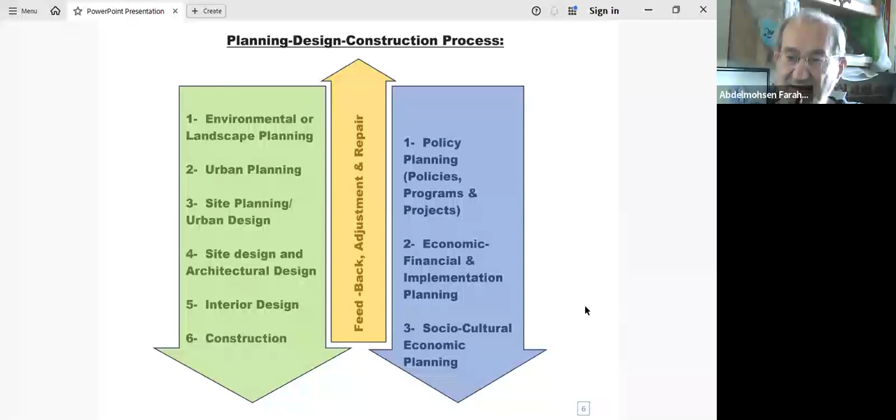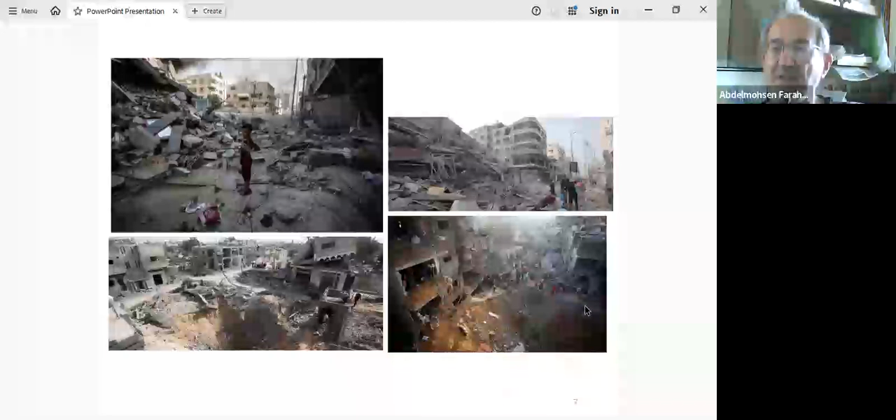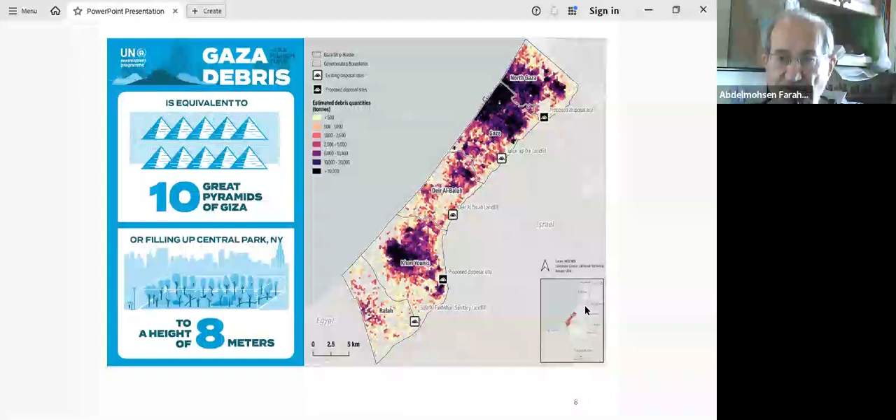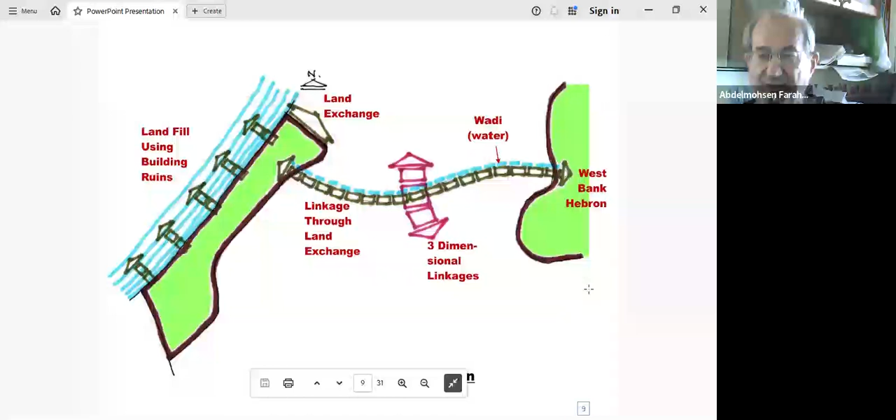If we want real peace to happen, this must be adjusted in a fair way. And one of the ways is to have land exchange. So land exchange can occur in the case of Gaza by expanding northward and by having a passage, a land passage linking Gaza to the West Bank. In that case, I would recommend highly to be accompanied by a wadi carrying water to Gaza. Then there must be a three-dimensional solution linking north to the south of Israel and, of course, east to west of Palestine.

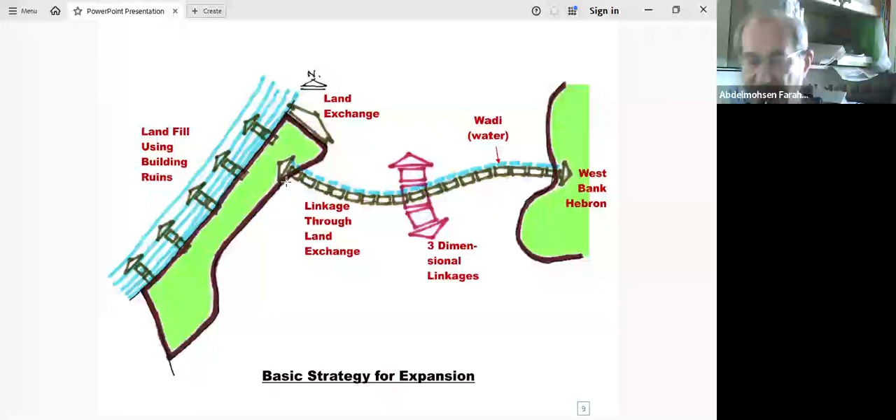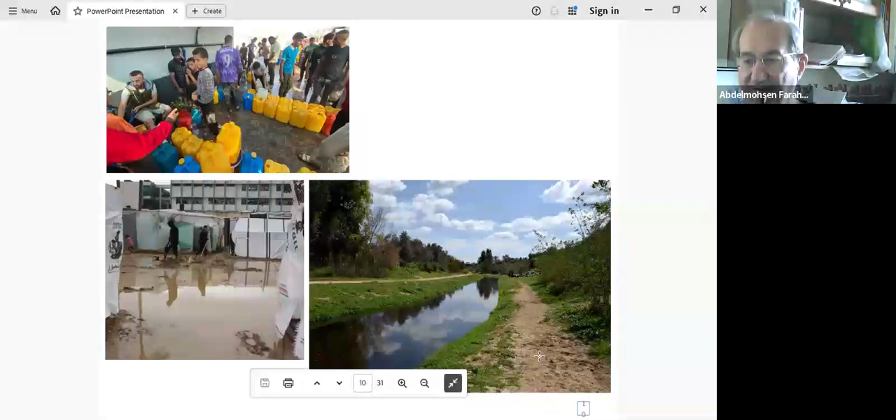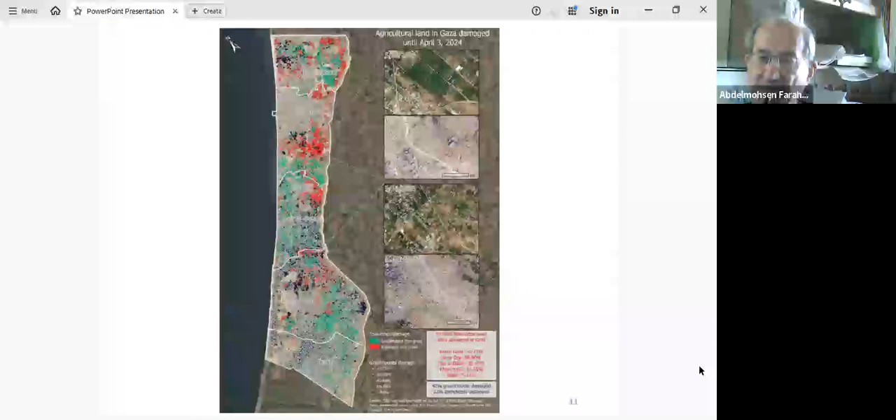This map indicates the destruction that happened in the agricultural lands, which leads me to this first step in planning, in environmental planning, which is the basic green open space system. Basically, agricultural land should occur more on the north, where rain is more frequent. It should occur on the east, the eastern borders, accompanied by anaerobic digesters with sanitary treatment of sewage into irrigation water, irrigating the agricultural land in a proper way in various degrees of purification. We will talk about this later. Of course, it would generate also methane gas as a source of energy.

Now, the starting point in this basic green open space system is the three wadis of Gaza: Wadi Gaza in the middle, Beit Hanoun stream in the north, and Al-Salqa stream in the south middle. On the north coast, another green strip can occur with greenhouses. Now, these greenhouses on the waterfront wouldn't be just for food production, but would also act as solar stills that convert saline water into irrigation and potable water.

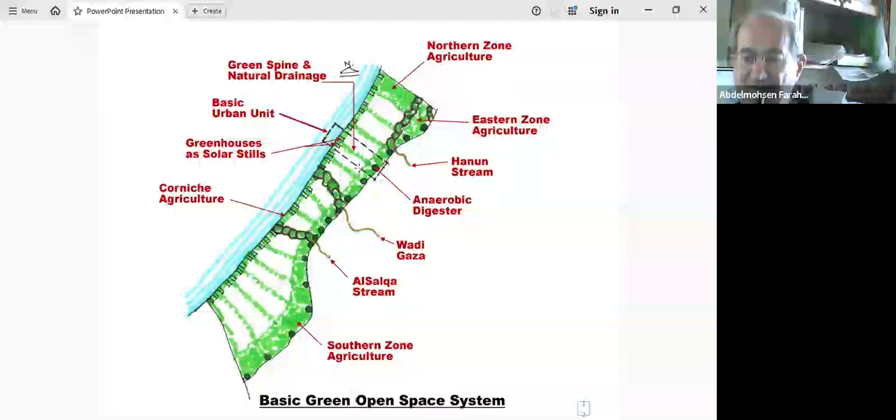Public transportation is very important, and the shape of Gaza is very suitable for public transportation. We have what is called Alrasheed Coastal Road on the west.

Then we have Salah ad-Din road in the middle, and I suggest a new one to the east related mostly to railroads and carrying goods that can extend to Egypt. The passenger road in the middle can also extend to Egypt. In my opinion, we should extend both of them to Egypt, linking the economy, strengthening the economy of both countries.

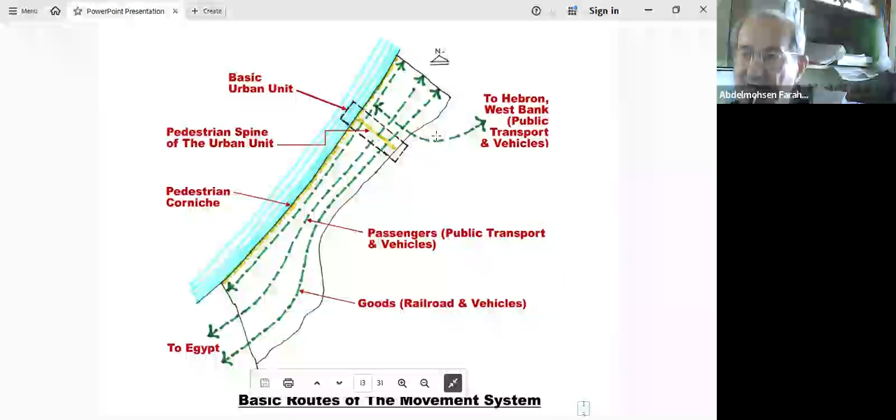Now, the basic urban unit we mentioned in previous diagrams would consist of agricultural land on the east and urban corniche on the west related to pedestrians, and greenhouses acting as solar stills on the west on the waterfront. All the area west of Alrasheed Coastal Road would be landfill, something between 1 to 2 kilometers. This is to a reasonable depth into the water. This would make a lot of valuable property in pure economic terms.

And in my opinion, it can add a value to the economic aid needed for the reconstruction of all of Gaza. Here, the private sector can participate a lot, but it shouldn't be left completely to the private sector. It should be controlled. This is number one, height of buildings, land uses, etc. But also the financial gains. The price of land paid in this property should belong to the whole society, not only the new owners of this new property.

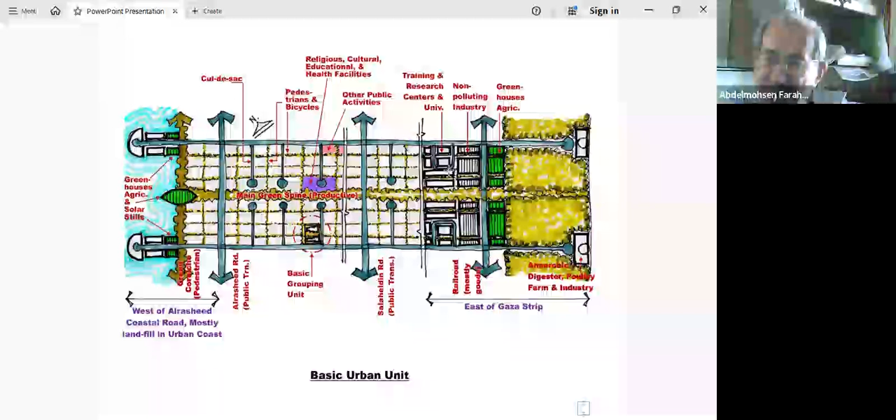So going from the east again, agriculture, then greenhouses, then non-polluting industries. The polluting industries would be attached to the anaerobic digester on the eastern edge. Beside the non-polluting industries would be training centers, research centers, universities, and some secondary schools, all attached to the non-polluting industries, working together to develop and advance.

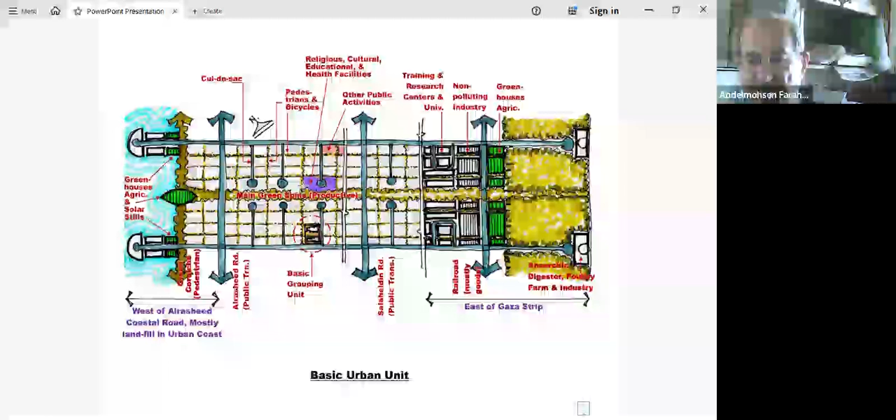Then we have the basic urban structure of almost any city, main roads and cul-de-sacs, and encouraging pedestrian movement as much as possible. And the distances would be very reasonable for walking. The weather also encourages walking and bicycles. There is a green spine in the middle of the urban unit. Everything green here is productive.

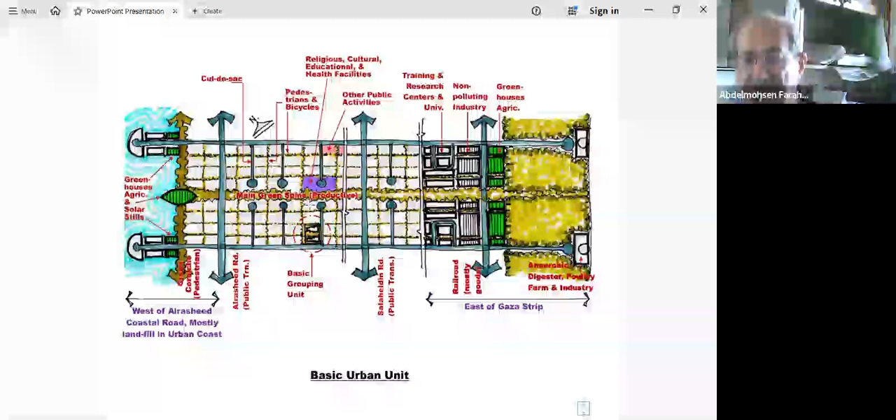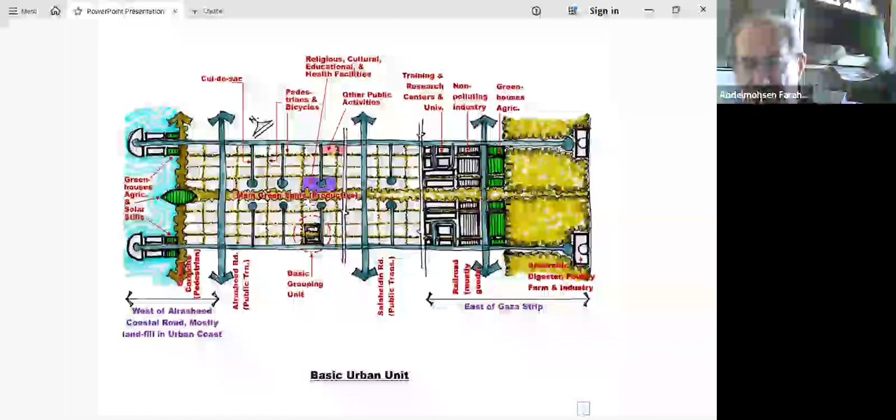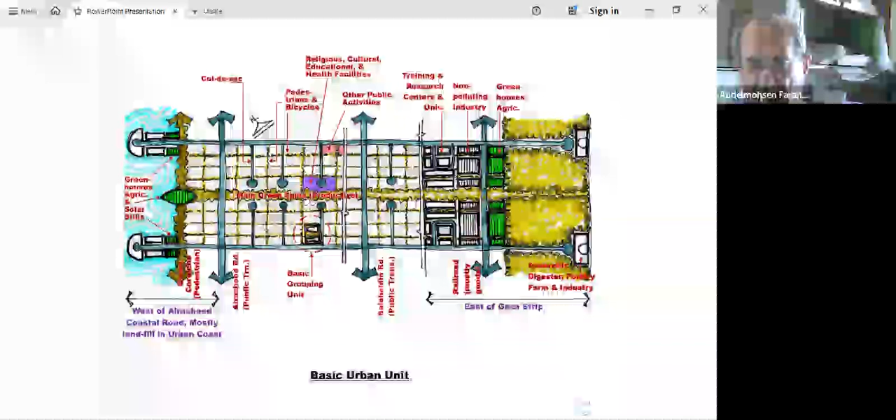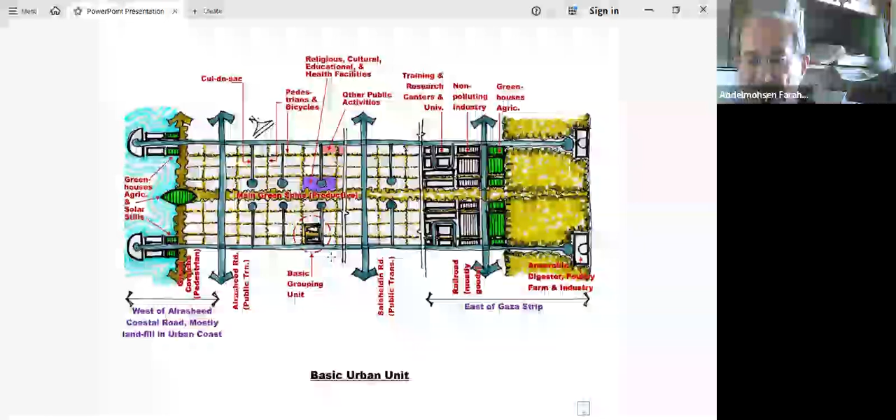The beautiful gardens of Andalusia were all productive gardens, producing vegetables, fruits, medicine, and perfumes. The fountain could be the source of the irrigation system, with a canal system related to the paving pattern of the garden. So everything in that garden was beautiful and productive at the same time. So it's an old tradition of integrating the aesthetic with the functional and the productive.

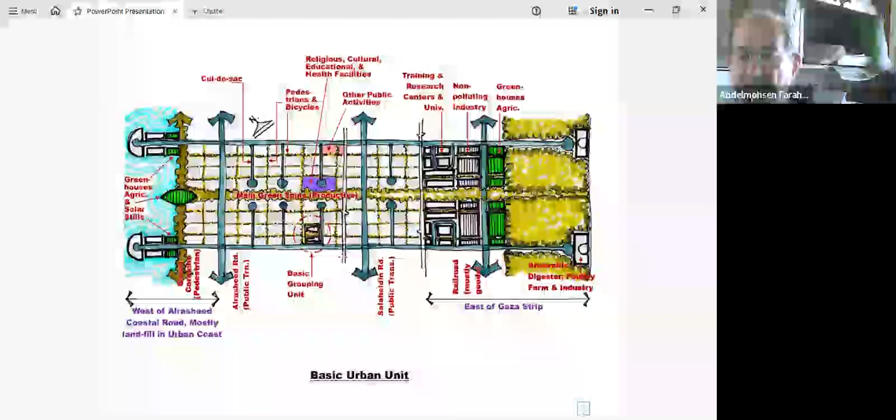This is a more detailed illustration of the eastern part and the western part without the huge middle part in between. So in terms of the agricultural, there are 3 zones going in hierarchy of the need for purification of water. So sewage treatment would be minimum in the first zone to the east. It can be just wooden forests.

The middle zone can be related to vegetables that need boiling, and the western strip would be suitable for vegetables and fruits eaten fresh. So in that last case, water quality should be the highest, followed by greenhouses, then non-polluting industries, then universities, research centers, and training centers.

Then we come to the waterfront property, and the most important principle here is that we avoid one row of buildings on the waterfront, which would have happened with Alrasheed Coastal Road and buildings facing the waterfront.

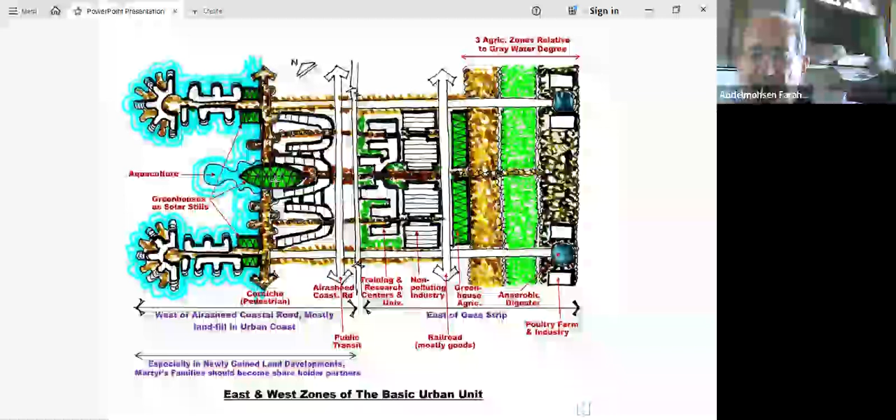In addition to the greenhouses I talked about in the middle and on the upper and bottom roads, acting as solar stills, converting saline water into irrigation and potable water. This is in addition to aquaculture related also to the greenhouse. They can support one another.

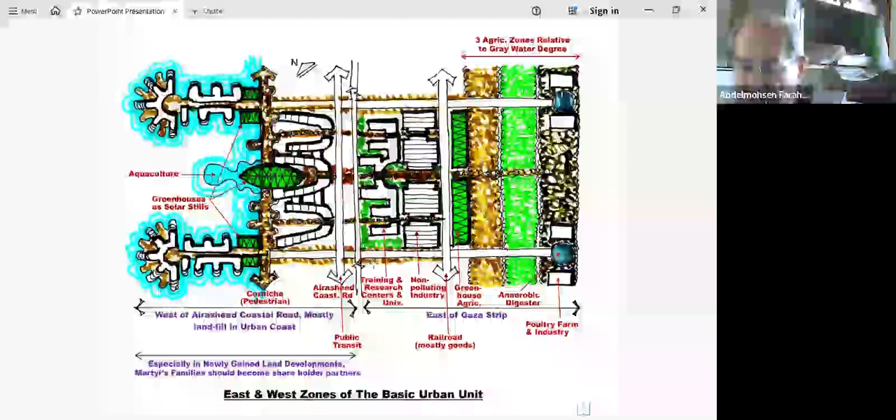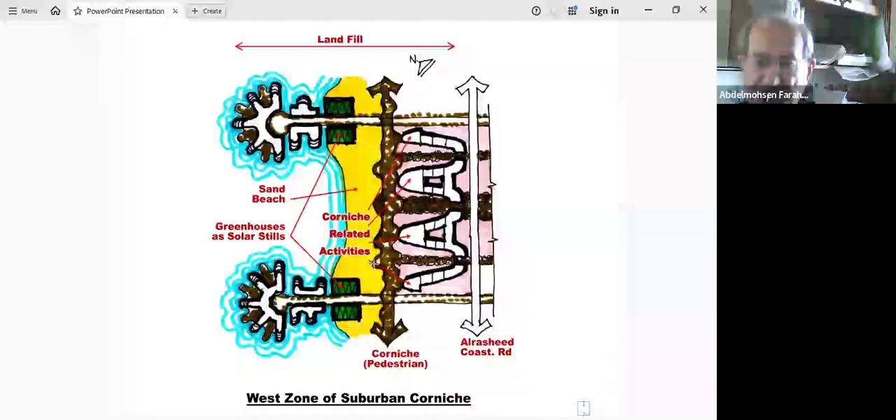This is what can be called urban corniche. But in addition to the urban corniche, we must have also suburban corniche, in which there is sand beach and the possibility of swimming. So according to site-specific factors, one would determine whether to go for the urban corniche or the suburban corniche.

Design guidelines: when we shift from urban planning to architectural design, in my opinion, we should not go directly to the single building, but we should go to what is called a grouping unit of several buildings. And the logic here is that the integration of several buildings into a grouping unit with a common open space would add a lot of good quality of life. This is number one. And number two, a lot of economic efficiency. I would say also socio-cultural efficiency.

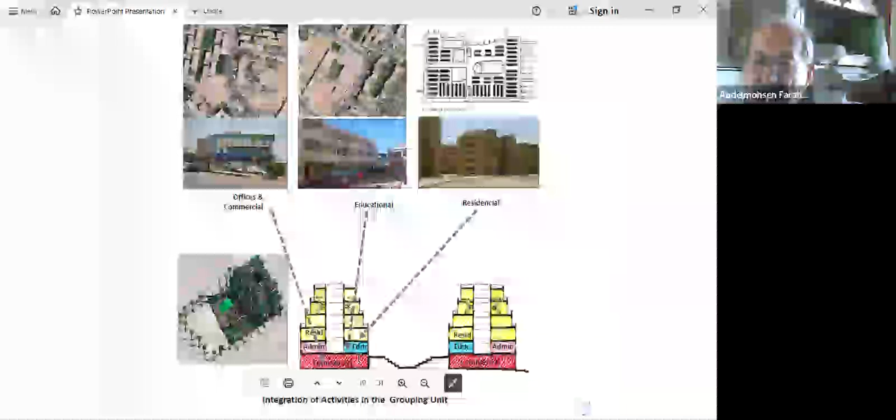So the main idea here is to put the regular common activities vertically above each other. Commercial activities at the bottom, including parking. After that, you have administrative activities on the outside and educational activities on the inside, facing the common space between the two buildings, and then followed by residential uses in the upper 4 floors. The total is 6 floors, but when you go into your residence, you don't shift directly, you shift indirectly, so the maximum going up would be around 4 floors.

Now, please notice that combining the open space of the educational facility with the residential facility means to save space, means to have more efficient use of space. And there is a logic in that. In preparatory schools, usually the ages are between 6 to 11. In my opinion, this is wrong. It means that one child is almost double the age of another child, using the same yard, using the same toilet. Children can hurt one another. So in my opinion, it should be divided into 2 halves.

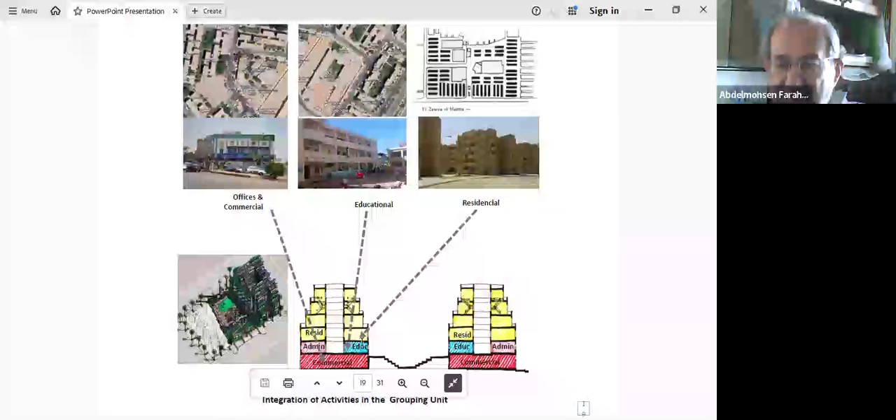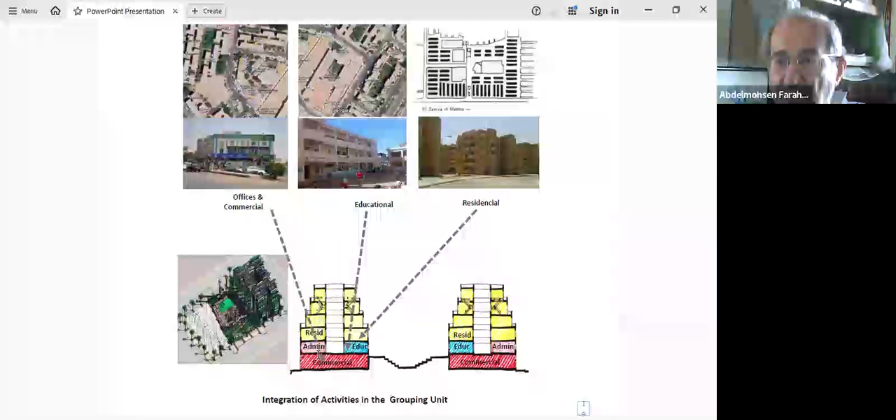And of course, the economic efficiency of the commercial activities, of the educational activities, of the administrative activities would save a lot in terms of the cost of the residential unit. The residential unit becomes much cheaper, whether in ownership or in rent, according to the societal organization related to this grouping unit.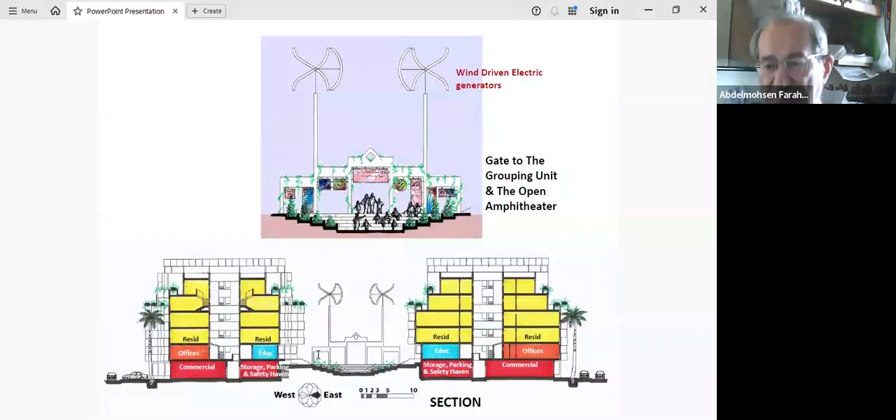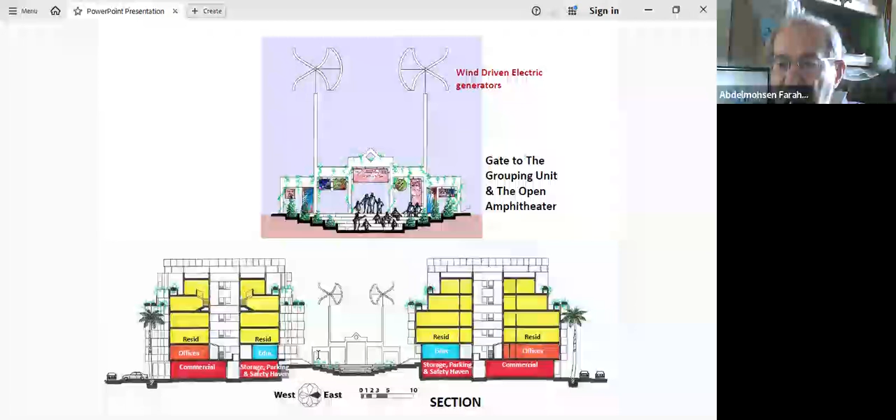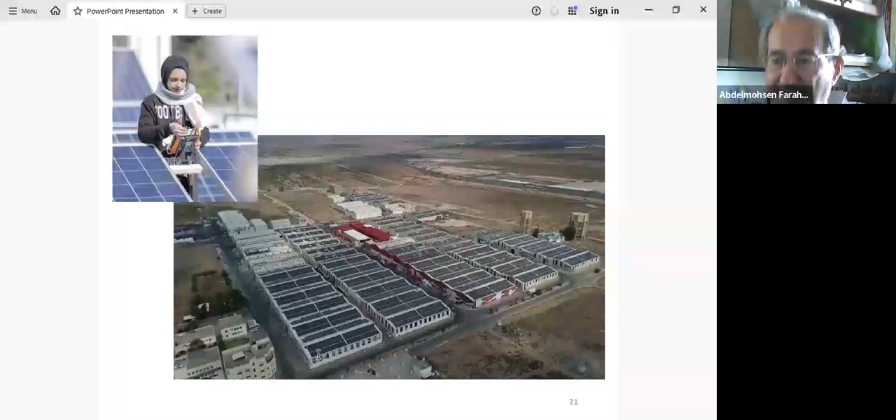More detailed section: the gateway to the grouping unit with wind-driven electric generators. This is medium to small scale, not the giant ones. And their placement in the space in between the buildings would benefit from the funnel effect of air currents, meaning that wind speed would be accelerated between the buildings, benefiting the efficiency of the wind generators. Solar energy was already applied in Gaza, but it should be applied at a far wider scale.

This is a 3-dimensional presentation of the grouping unit. Photovoltaic solar collectors at the top. Food production takes place in all terraces of the residential units and also in the public spaces, also in the streets. And there is an open air amphitheater in the middle, used as open air classrooms or just for public performances day and night as a social space.

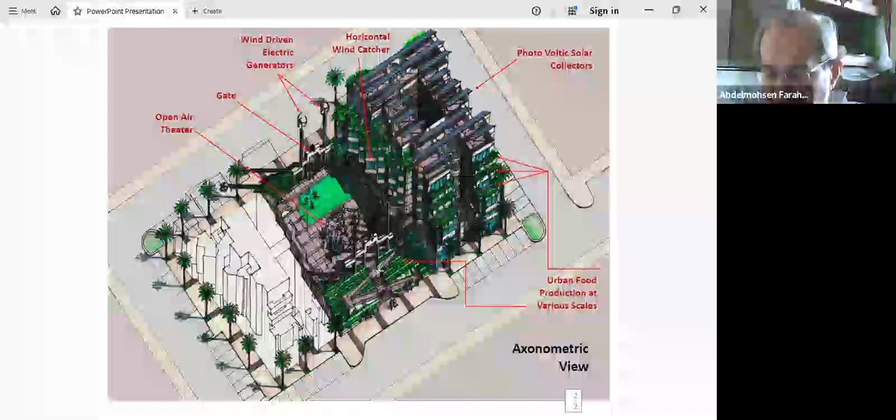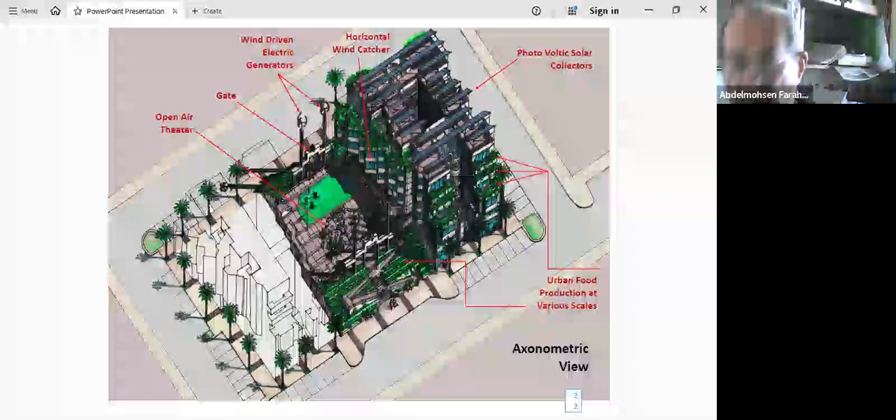I'm sorry, I did something wrong. Okay. Yeah, sorry.

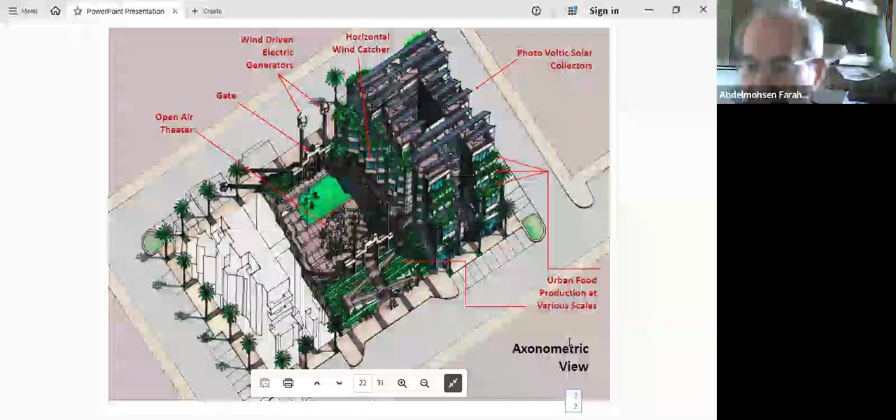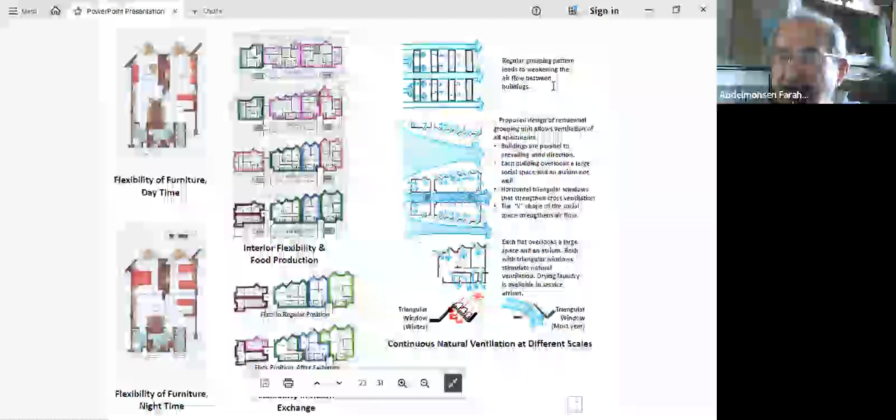Okay. These are more details of the grouping unit. On the top right hand, it is wrong to place buildings perpendicular to the wind direction, because this would mean very good ventilation on the front row and very bad ventilation on all rows of buildings following that.

It is better to put buildings parallel to the wind direction in the middle right-hand sketch. So especially if you have horizontal wind catchers, this would guarantee proper ventilation of every room in the residential unit and the same ventilation of all rows of buildings following the front row. The wind catcher can be also solar catcher when needed.

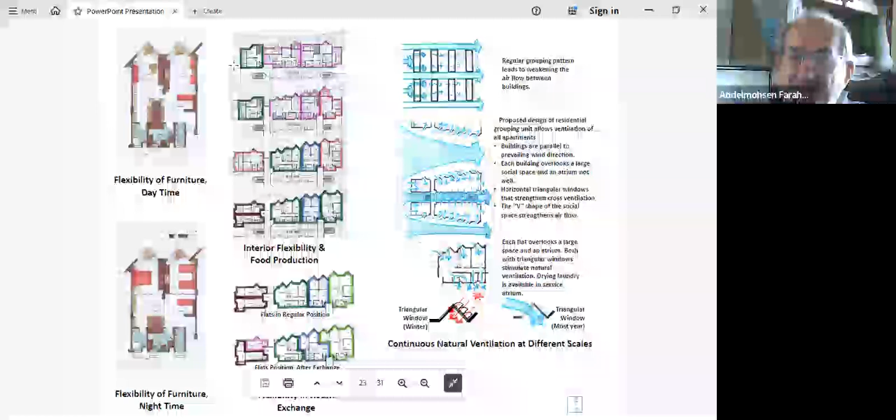On the left-hand side, there are a lot of possibilities for flexibility in terms of interior flexibility, in terms of food production, in terms of flexibility of furniture, daytime and nighttime. So a lot of potentials and possibilities are there.

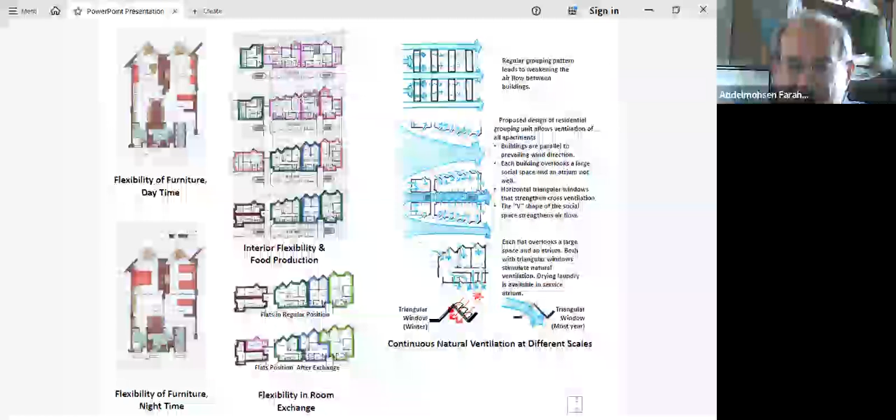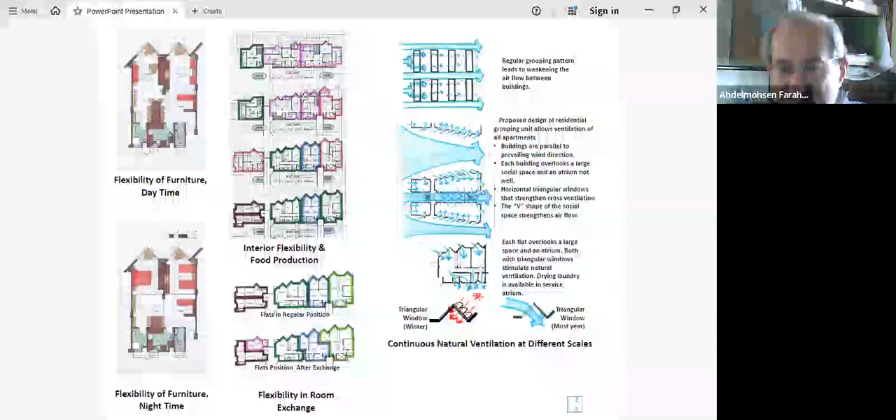To summarize it, one could have an apartment, let us say 70 square meters, that appears and functions as an apartment of, let us say, 100 or 110 square meters. Why so? Because of proper and more efficient architectural design and interior design. More details of the plans, different plans, and the site plan of the grouping unit.

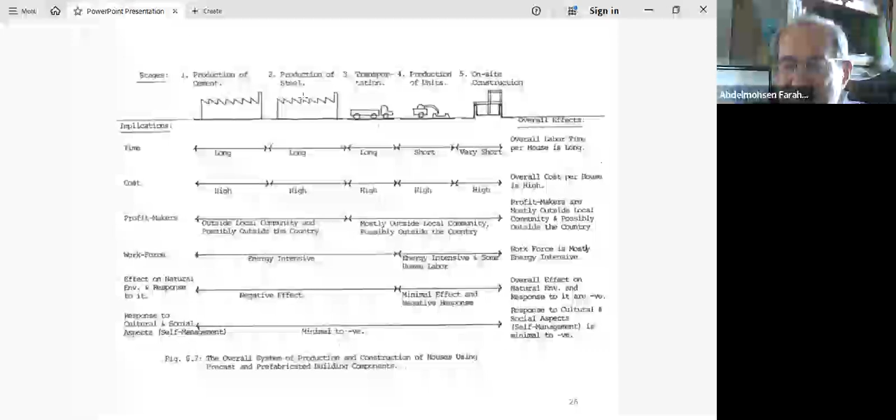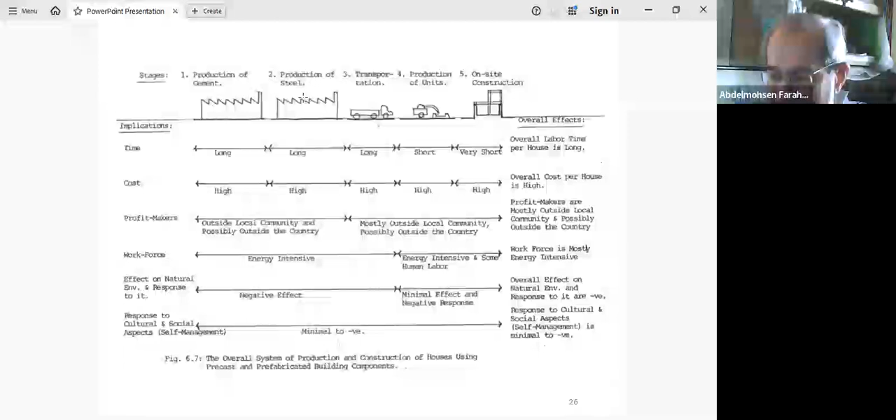Now, in terms of construction, already proven through research and references in a research related to rebuilding small settlements in Afghanistan after one of the wars, it was proven that prefabricated systems are not only more expensive than traditional systems, but can be even slower. And this is the surprise. Traditional systems can be faster in building, especially residential buildings, if you calculate all the production process from the beginning to the end.

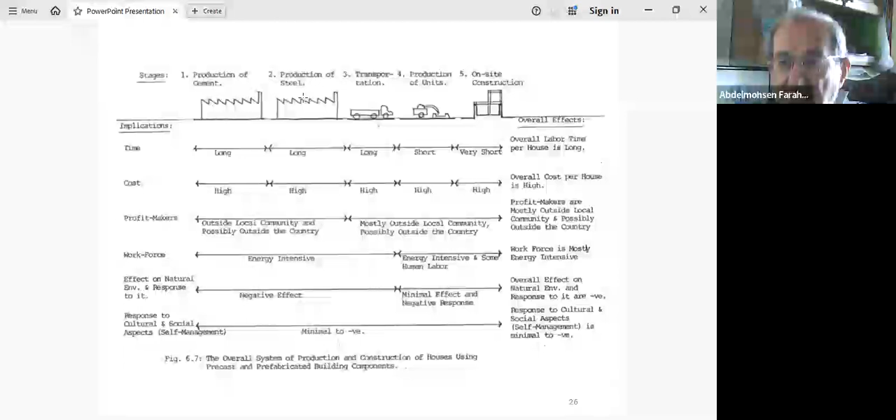Now, I'm not saying that you would build vaults and domes in one-story buildings in Gaza. The situation is different. But what I'm saying is that, as an example, stabilized earth blocks that are hand-pressed can be very efficient, more efficient than prefabricated systems. There are special cases, for example, a certain part of a hospital, highly technical part, then here more industrialized systems can occur.

Cultural and artistic guidelines must never be forgotten. Historic areas are very important. I didn't have enough information about site-specific places of them, but I should mention that in terms of historic conservation, a shift already happened from caring only about historic buildings to caring about historic sites, to caring about historic districts that include both historic buildings and contemporary buildings, but in a way that makes the whole urban tissue integrated and living, a living tissue, not dead museums, but living cultural places. And it would strengthen the identity and the feeling of belonging to this place.

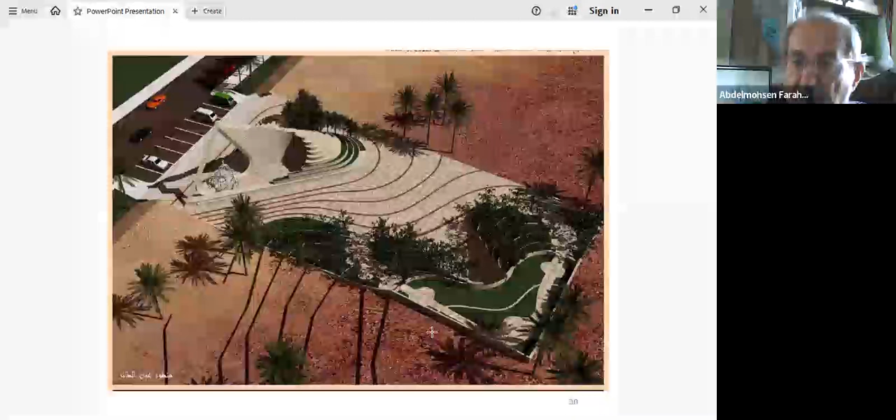A heart shape: the pyramid is deformed into a heart shape in plan pointing towards Jerusalem, and in elevation pointing towards the sky, with the skeleton of the Dome of the Rock in the middle. The bird's eye view, the green part has underneath it a small museum, a night view, and a site plan.

That's all. I thank you all very much. I must say at the end that looking at the future can help resolve the problems of today. When there is a lot of hope in the future and the quality of life that can occur in it, I think it can help establish real peace, sustainable peace between Palestine and Israel.

The second point I want to make clear is that I am not trying to illustrate a rigid picture of the future in any of the drawings I illustrated. They should be taken as generic models illustrating the principles and some of the basics, perhaps the most important ones. And then they can be adjusted, deformed according to site-specific circumstances. That's all. Thank you very much.